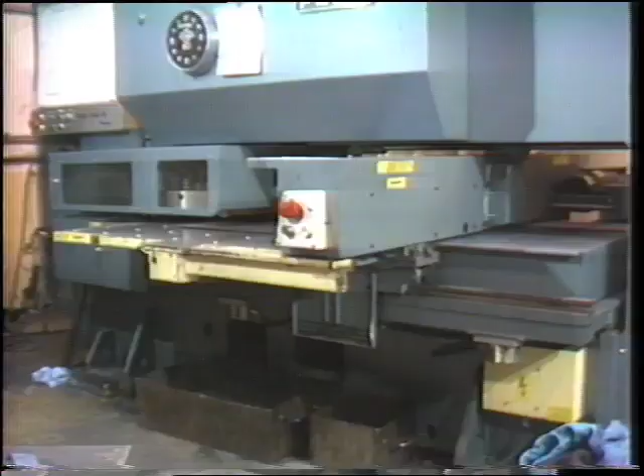In this space-age world we live in, it's still the simple pleasures we enjoy the most. And the romance and beauty of a wood fire is often a part of the scene. Family, friends, and the warmth and comfort of a wood stove and fireplace have become a familiar and everyday part

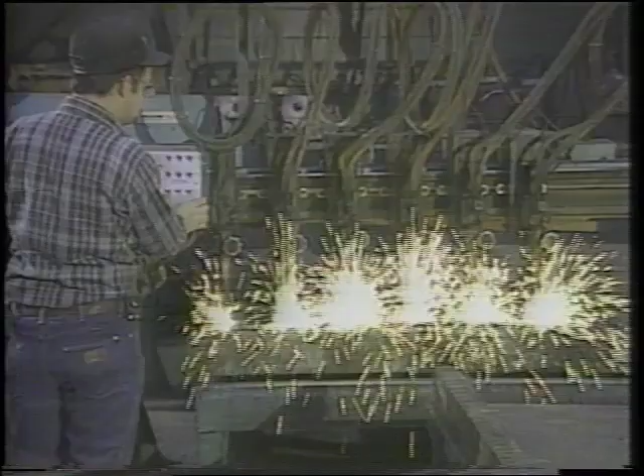of modern living. But today's wood stove is also a modern wood heating appliance, providing safe, efficient, and economical home heating. Built to meet stringent safety and air quality standards, modern wood heating appliances come in a vast variety of styles, colors, and shapes to fit the decor of any home. Modern, traditional, classic. Whatever your tastes, you'll find a wood heating appliance that will grace your home with warmth, comfort, and the pure, simple enjoyment that comes from wood burning.

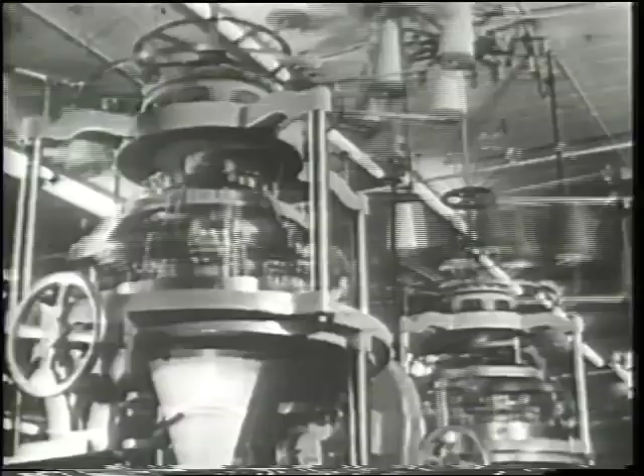As with most modern appliances, the evolution into the modern age was not without trials. America had just left behind World War II. The boys were home, the economy was on the rise, and the good life seemed attainable by everyone. Younger families wanted the latest new appliances that relied on a seemingly endless supply of oil, gas, and electricity for power. The old standby, dependable wood stove of Mom and Dad's era fell out of favor, replaced by the new look of modern heating appliances.

And the good life did indeed continue. Cars got bigger, homes more spacious, and appliances used more fuel. Then the bubble burst. Bigger and faster cars weren't much good in a gas line. The Middle East oil embargo changed the course of America's consumptive ways. Americans now found themselves relying on foreign supplies for fuel. Americans again returned to their old standby, wood, and no wonder. Faced with higher heating bills and dwindling fuel supply, wood, an abundant and renewable native resource, became an excellent alternative.

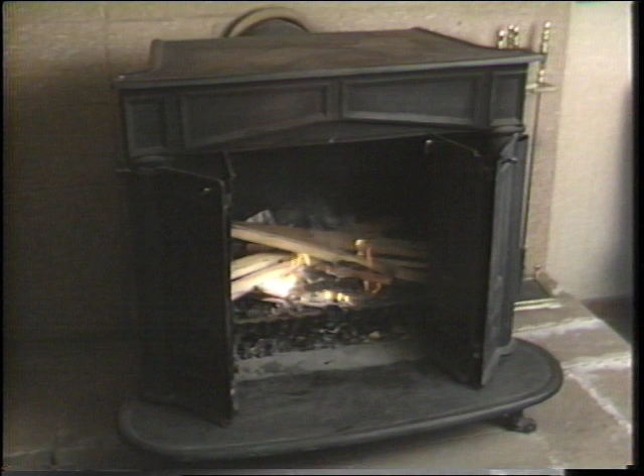Unfortunately, wood stoves had been out of favor for more than 2 decades. During that time, the wood heating industry had become smaller. Wood stove technology had not kept pace. During the same period, our air quality was suffering under the onslaught of a modern industrial world. Reduced air quality, stemming by and large from the reliance on oil-based fuels and coal, became everyone's problem. Unfortunately, some of the blame fell on the small but growing wood stove industry, in part because of the lack of a public education about good burning habits and the industry lag in stove technology.

Matters were complicated by industry efforts to build more wood heating units. Wood had become a popular source of heating. The industry found itself trying to catch up with the consumer demand for more stoves. There was little time to develop the technology that could lead to cleaner and more efficient stoves. Ironically, the intense, renewed popularity that revived this developing industry also caused it to come under scrutiny. It was a case of a developing industry unaware of the growing air pollution problem. The government, as they did with many other industries, sought assistance from the wood stove industry to help solve this air quality dilemma. What they found was an equally concerned and willing partner.

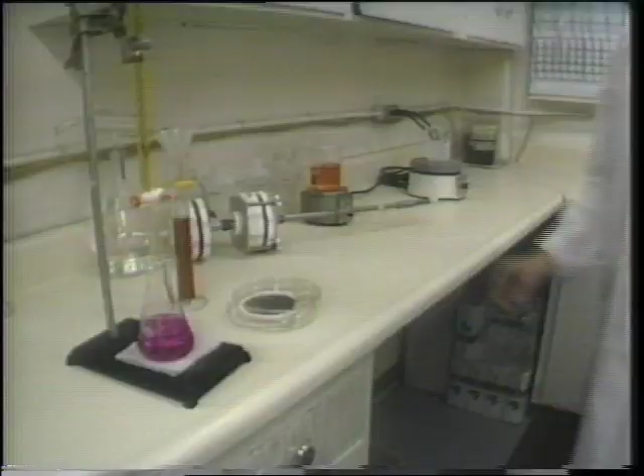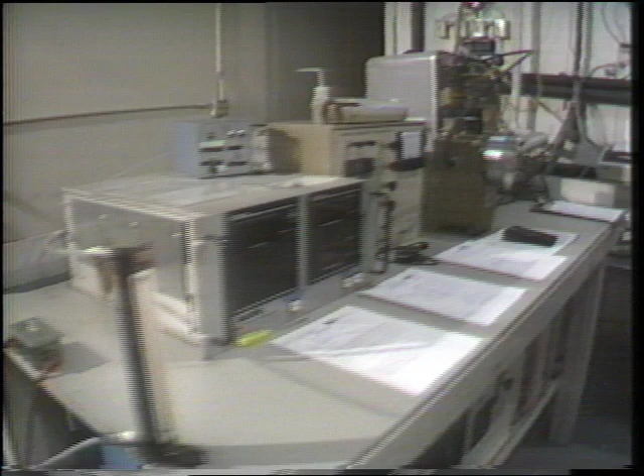In the late 70s and early 80s, wood-burning stove manufacturers, dealers, installers, and trade associations faced this challenge head-on by developing a technologically improved wood stove, cleaner, safer, and more efficient. Further, they began to develop safety listings for new stoves, improved standards for installation, and continued more vigorously educating the public about safe and efficient wood-burning practices. The result of this effort has been positive for both the industry and the consumer.

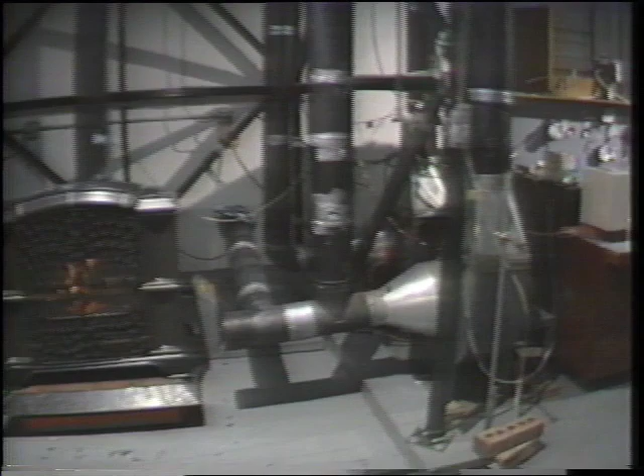Actually, it was discovered that older stoves didn't necessarily have to be a problem. Burned correctly, most were safe and clean. But because they weren't as sophisticated as the new improved design, they often burned inefficiently during a period in which the most smoke is created: long, slow burns. If a homeowner didn't burn dry wood or didn't burn according to the manufacturer's guidelines, the problem intensified. This, combined with existing air quality problems, inspired the wood energy industry to assist the Environmental Protection Agency by developing a cleaner and more efficient wood stove.

This problem-solving new design came about by looking at the basic components of wood combustion. In wood, there are actually two types of fuel available: the solid matter, which we commonly refer to as the wood, which comprises 50% of the available energy, and the smoke that is created by burning the wood, which accounts for the remaining 50% of the energy. The smoke in an older stove was escaping, by and large, into the atmosphere and creating a 50% loss of potential fuel. The problem could be solved by burning the smoke as well as the wood. Unfortunately, smoke has an ignition temperature that is much higher than wood. The problem: how to burn both the smoke and the wood in the same stove.

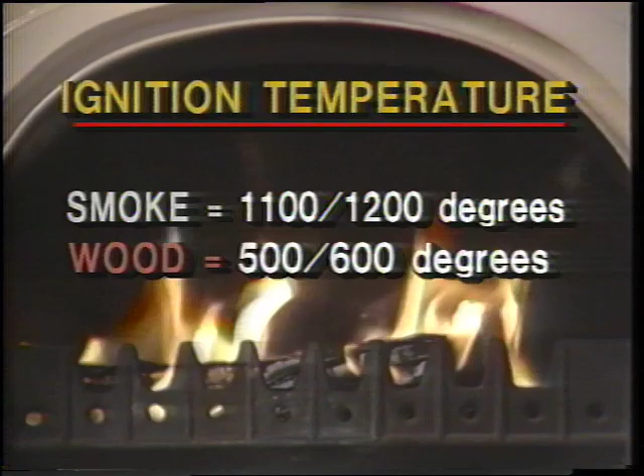The industry responded to this problem with not one, but two improved technology solutions. The standard airtight stove was upgraded in a very significant way. A high temperature chamber was developed and placed in the smoke's exhaust path. By feeding the chamber controlled air, a high temperature environment is created that burns up the particles in the smoke before they can escape up the flue.

This not only reduces emissions significantly, but it recovers the smoke as a valuable source of heat. Because the stove is burning all available fuel at maximum potential and releasing less smoke into the atmosphere, it's burning clean and at the highest level of efficiency.

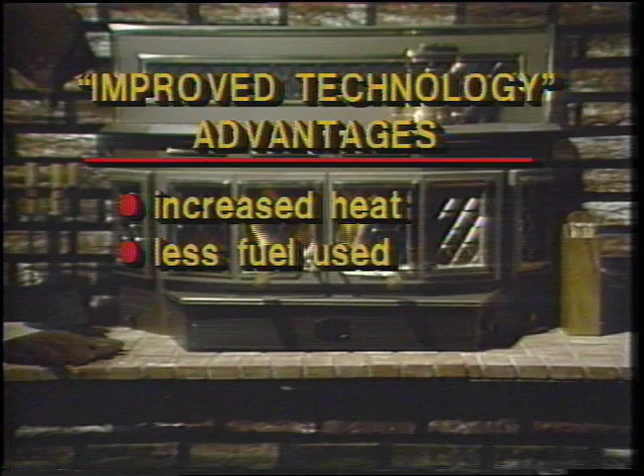The homeowner gains in 4 ways with this improved technology wood stove: increased heat from a more efficient stove. Less fuel is required because the stove burns less wood. An efficient stove burns more safely. And the stove produces less smoke for better air quality.

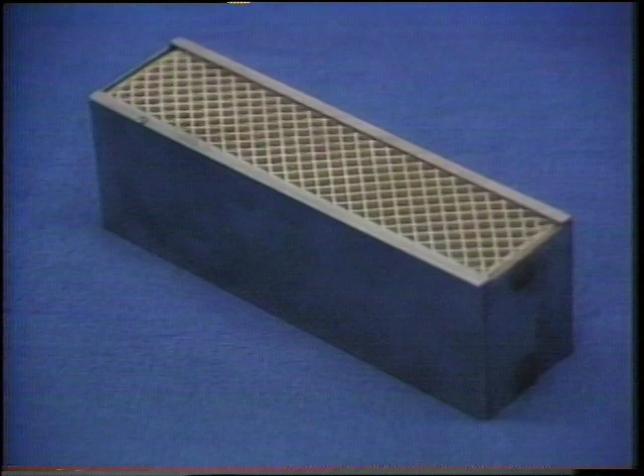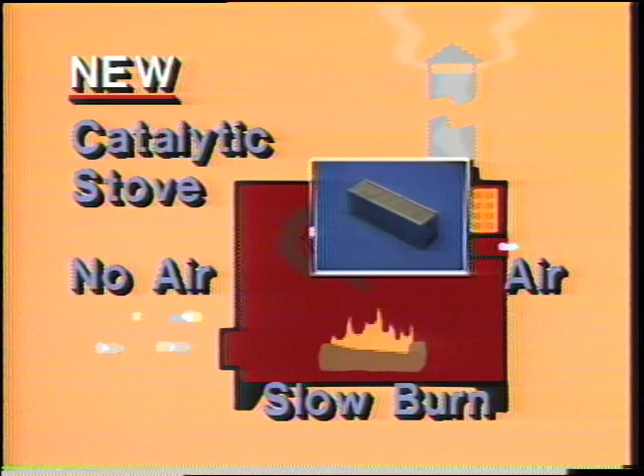Another popular improved technology approach used to solve the air quality problem was the development of a catalytic converter, similar to the catalytic converter in a car, which burns up exhaust smoke before it gets into the atmosphere. In a catalytic stove, the smoke is forced through a honeycomb-like device fed with air.

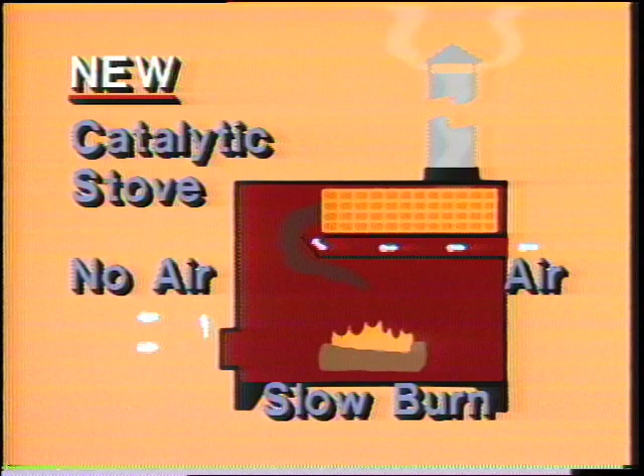This device lowers the ignition temperature of the smoke to one closer to that of wood, thus allowing the smoke to burn at about the same temperature as wood. The same advantages of economy, safety, and a cleaner installation are also benefits of catalytic stoves.

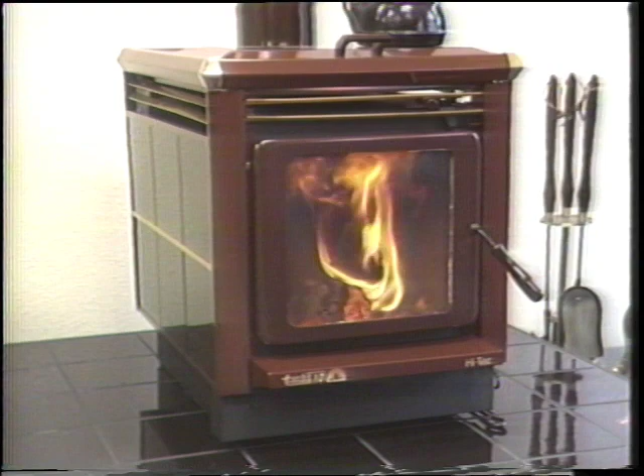So successful are these new improved technology wood stoves, many often exceed the clean air standards enacted by the Environmental Protection Agency. These standards, stated simply, prohibit the manufacture of any wood-burning stove that does not meet the minimum clean air standards set by the Environmental Protection Agency. New improved technology stoves meet the air quality challenge head-on. Today you can enjoy the warmth and comfort of wood and know you're burning clean.

However, this legislation can leave homeowners with some questions. Is my old stove okay to burn? Do I need to buy a new stove? These questions can be answered in 2 ways. No, the law does not require that you replace an existing stove. But there is another answer. Yes, we all have a responsibility to keep our air clean, and an improved technology wood heating appliance does just that.

Besides being a better neighbor, you'll receive the added benefit of more burn for your buck from an efficient, properly installed and used improved technology stove. In addition, you'll have the added benefit of a safer and cleaner stove, and that means the security of knowing you and your family are enjoying wood heat in the most responsible and safest way.

So even though it's not mandatory to purchase a new stove, it's a good idea if you want to take advantage of today's high efficiency, maximum safety, and cleaner burning wood heating appliances. If you have specific questions, your local wood stove dealer or state energy office is the place to start. Your dealer is a wood heating expert and can offer a detailed look at the latest in improved technology stove hardware.

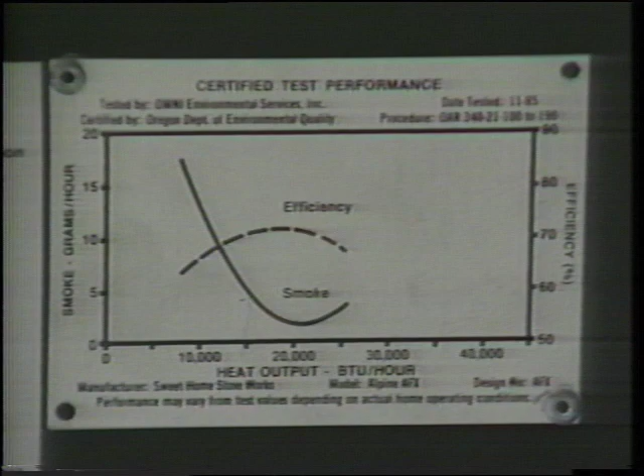One of the first things to look for when you purchase an improved technology stove is a certification label. This label means the stove meets today's stringent clean air standards for wood-burning appliances and has been tested by an accredited laboratory.

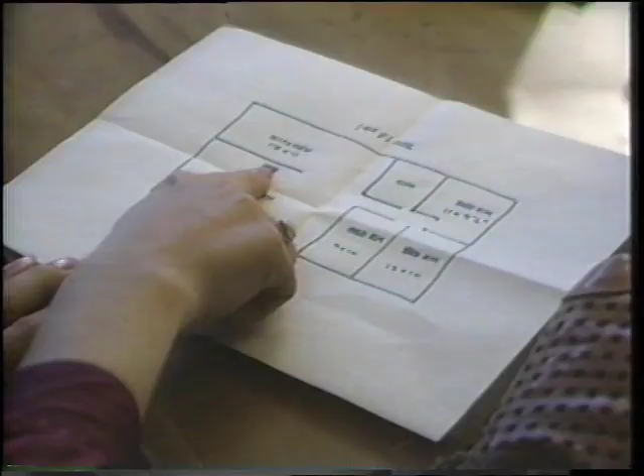The next step is to select the size of stove best suited for the space heating requirements of your home. This is called sizing, and with proper room measurements, your dealer can direct you to many new exciting models that will fit your needs. Be sure to consider ceiling height, room size, and number of rooms to be heated.

Considerations such as heat flow and which room is to receive the most heat should also become part of your plan. All these factors will help you determine the needed space heating capacity of your new stove. Your dealer can then help you select a stove that will deliver the right amount of heat to the right rooms with the proper heat flow at the right cost.

Another important aspect of stove selection and installation is placement. In addition to appropriate heating capacity, your stove should be placed away from traffic areas, and the area of installation should be of sufficient size to allow for proper installation.

Once you've made all the heating and spatial decisions, it's time to take a look at stoves that fit your decor. Modern stoves offer a vast array of styles suited to a variety of tastes. New technology stoves can be bold, modern, homey, traditional, classic, virtually anything you want them to be. Catalytic or non-catalytic, all are certified and bring the advantages of a safe, clean, and economical burn.

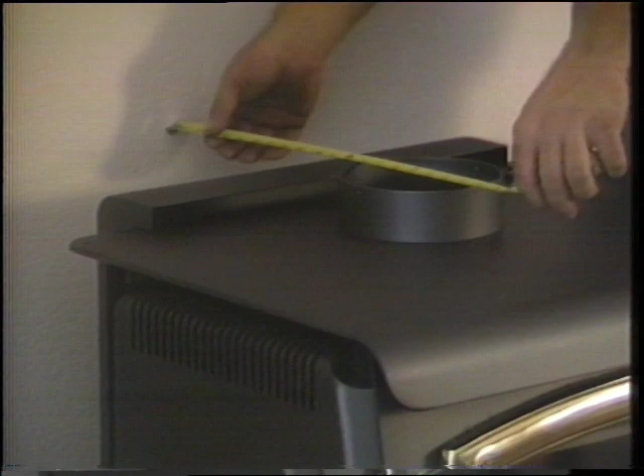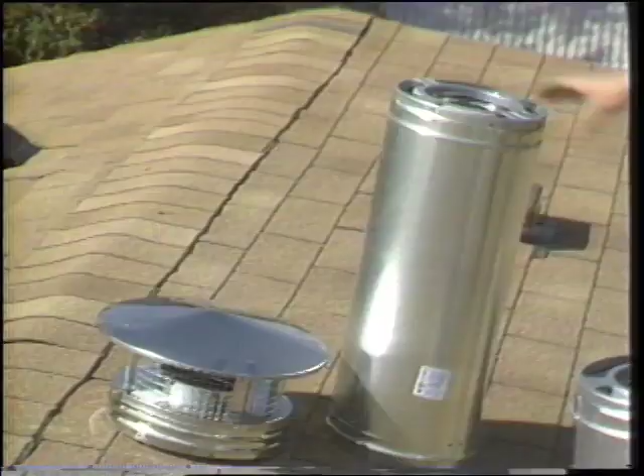Installation of your appliance should generally be done by a professional installer. However, many stoves are installed by homeowners. If you do it yourself, be sure and follow the same safe and correct installation procedures used by a professional. A crucial element in any installation is the chimney. Always refer to your manufacturer's guidelines listed in the installation and operating manual for this important information.

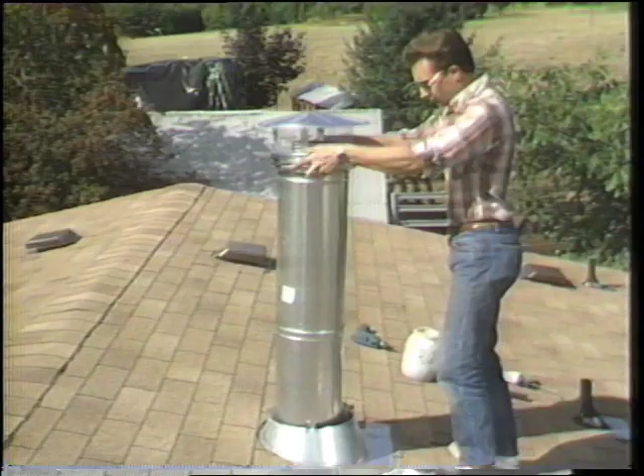Installation of certain types of stoves may involve several chimney considerations. For example, if your choice is a fireplace insert or hearth stove that exhausts into a masonry chimney, you should have your existing chimney inspected for suitability. It may be necessary to add chimney relining to your plans.

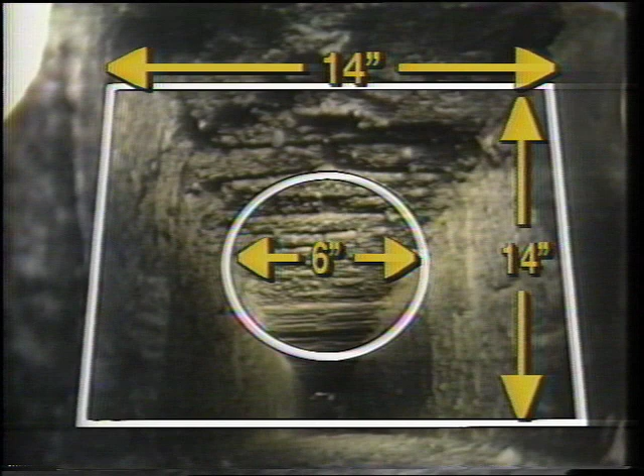Often, older masonry chimneys do not have the necessary clay flue liners needed to provide an exhaust for a wood stove. Those that do have flue liners are sometimes cracked or damaged from age. In these cases, it is necessary to reline your masonry chimney. Further, many masonry chimneys are not sized properly to your stove and need relining for proper sizing of the flue.

Burning a wood stove in an improperly sized chimney can build up excessive amounts of highly flammable organic compounds called creosote that attach to the inside of the masonry chimney. This condition can increase the possibility of a chimney fire unless corrected.

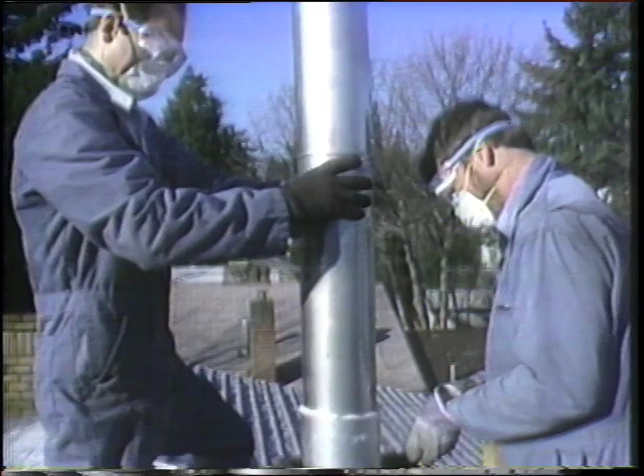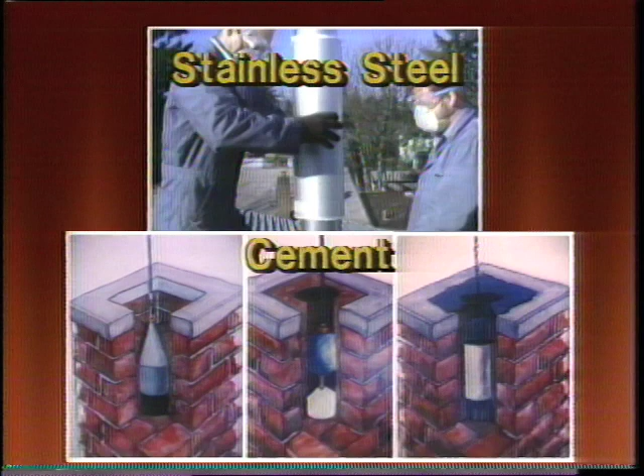The solution to any of these problems is the simple relining of your chimney with one of several types of approved relining systems. As well as contributing to the safety and efficiency of your stove, these systems assure that your chimney is properly sized to your stove. In addition, relining systems used with proper burning practices keep creosote buildup to normal levels that require nothing more than regular chimney sweeping.

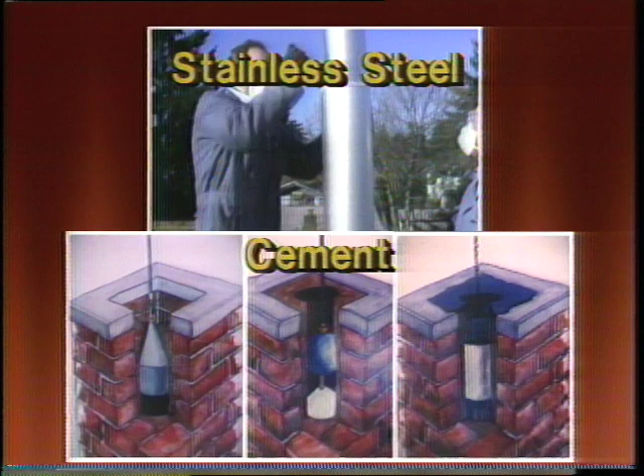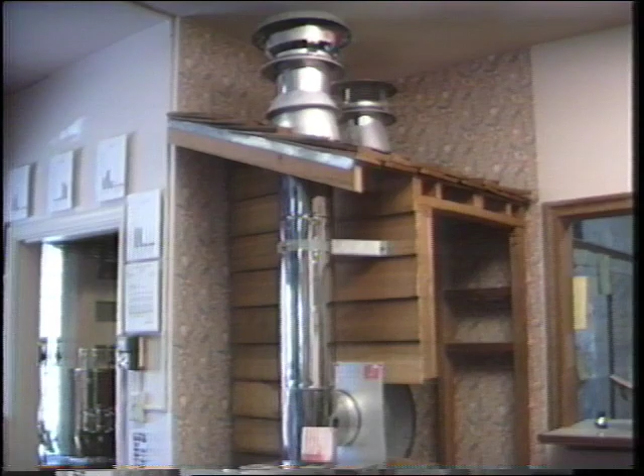Another chimney choice is a factory-built metal chimney. If you're building a home or remodeling, a factory-built and site-installed approved UL 103 HT metal chimney is also a safe and durable alternative and has a flue size to accommodate your stove.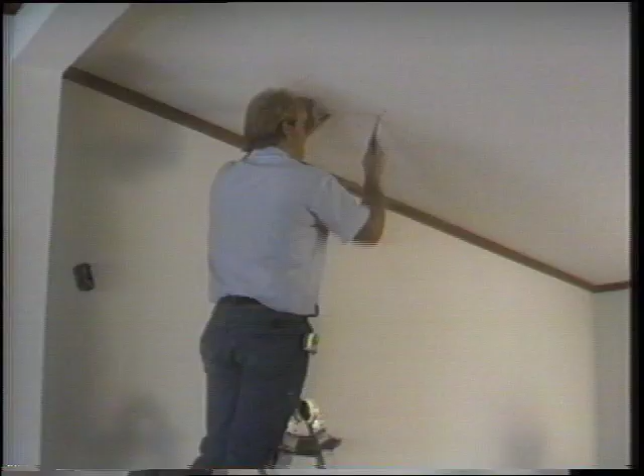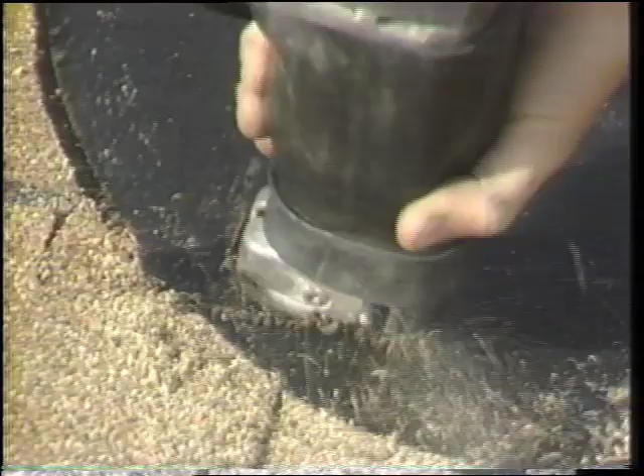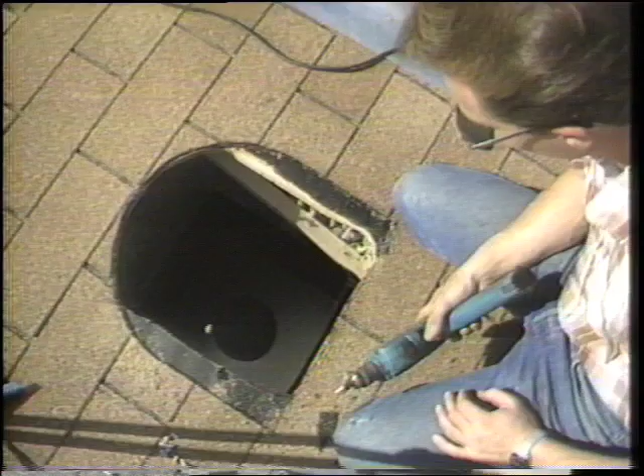Installation of your stove into the room is another important element in determining its safety and efficiency. There are professional installers who are ready to assist you in purchasing, installing, and the maintenance of your stove. In 1981, the Wood Heating Alliance founded the Wood Heating Education and Research Foundation, or WERF for short. WERF is a nonprofit foundation formed to serve the public interest in advancing the safe and efficient use of wood and other solid fuels for residential heating.

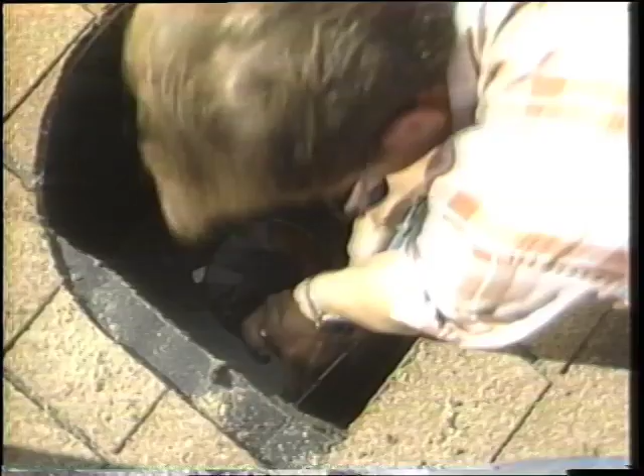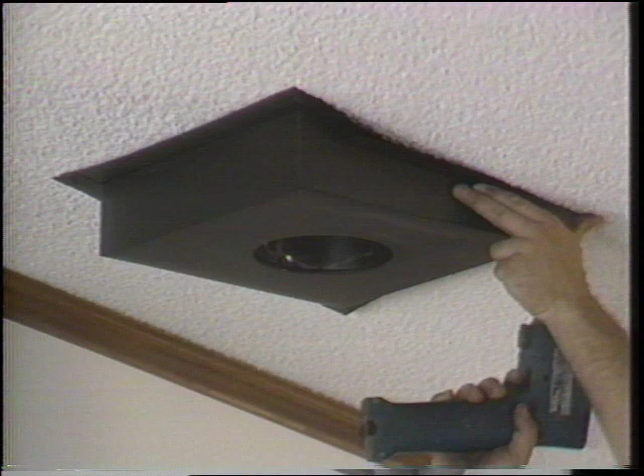WERF sponsors the Solid Fuel Safety Technician Program, an in-depth study and testing program for home heating professionals and fire inspectors on the installation and use of solid fuel appliances. Over 2,200 participants have entered the program and have been certified as solid fuel safety technicians. The aim of this program is to ensure that consumers throughout the nation will have access to experienced and properly trained installation technicians. WERF certification, or using a licensed state installer and checking references, is always a good idea when selecting an installer. When installing a new stove, your wood stove dealer or local chimney sweep should be consulted.

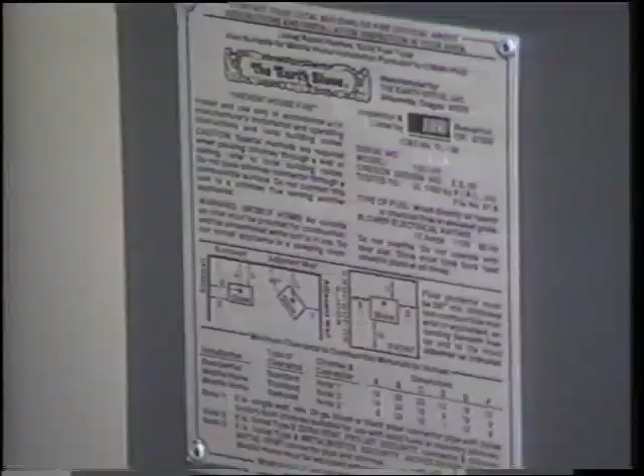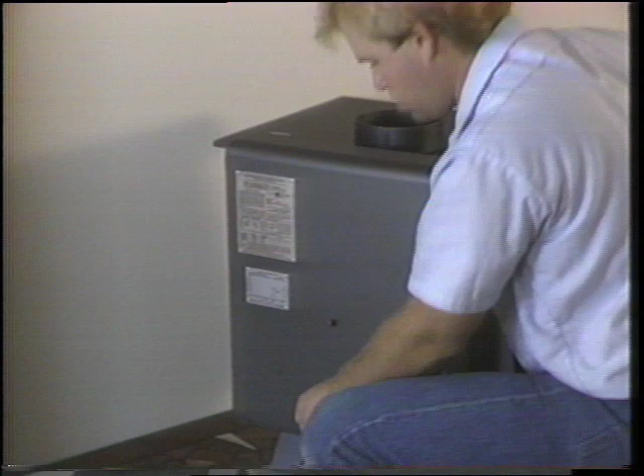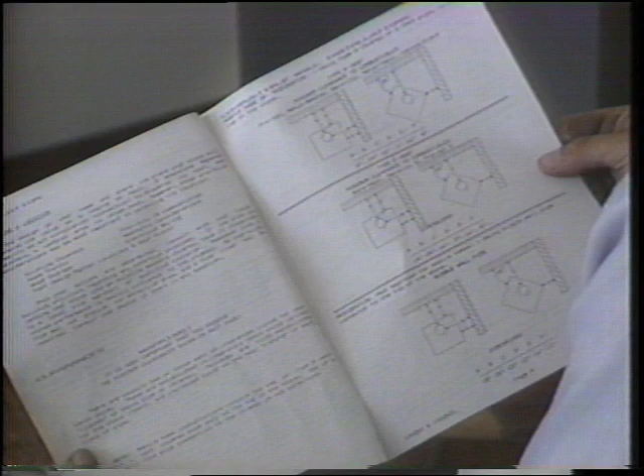Because of the tremendous variety of stoves and styles available, each stove has slightly different installation requirements. A good installer will check the manufacturer's guidelines for installation requirements of a specific unit. Your dealer can answer any questions you might have. Always make sure the installation follows the clearance guidelines on the safety label attached to the back of your wood heating unit. These clearances were established to ensure your stove is installed safely away from household and other structural combustibles. Professional or do-it-yourselfer, it's vital to consult your manufacturer's clearance guidelines in the installation and operations manual.

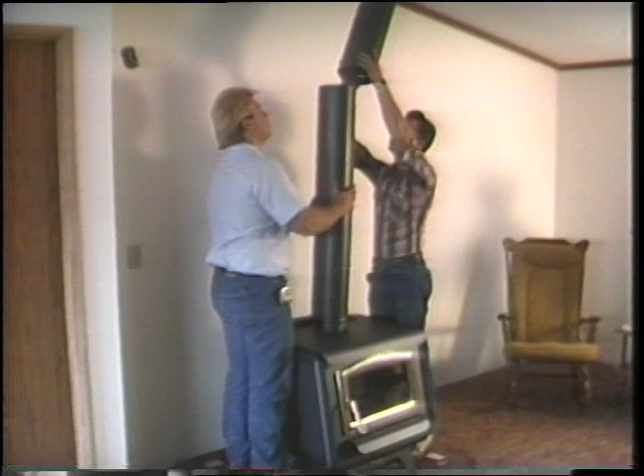Be aware that many areas of the country have differing codes and regulations for wood stove installations. Always check with your local code officials to see if an installation permit is required and what local installation codes must be followed. Any certified installer should be familiar with both permit and installation codes. Again, check with your dealer if you have any questions.

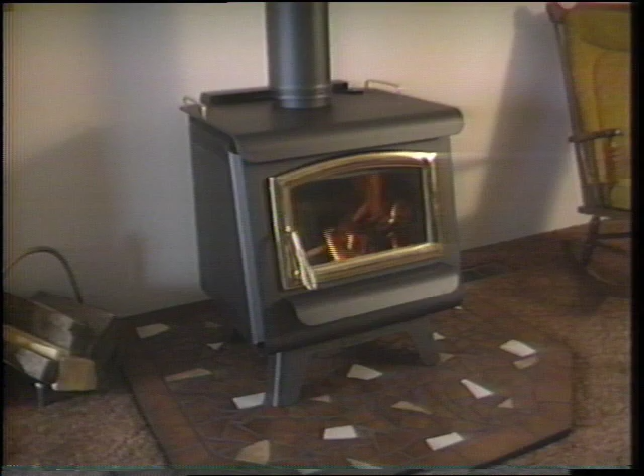Above all, consult your dealer to arrange for a professional installation technician to visit your home. These professionals are experienced and familiar with the wide range of appliances, permits, and codes necessary to the safe and proper installation of your new wood heating appliance. And remember, it's a good idea to notify your insurance agent that your stove has been properly installed by a professional installation technician.

A properly installed certified stove is a welcome addition to any home. It brings the comfort associated with wood heat and is a practical, natural way to heat your home. But like any appliance, the proper use of the appliance and fuel is essential to maximize the safety and efficiency of your stove. The clean, safe, efficient use of your stove can be maximized by the proper handling of fuel and good burning practices. It's easy to do right, and it takes very little time. In return, you'll receive all the benefits that can be derived from the joy of burning wood for heat.

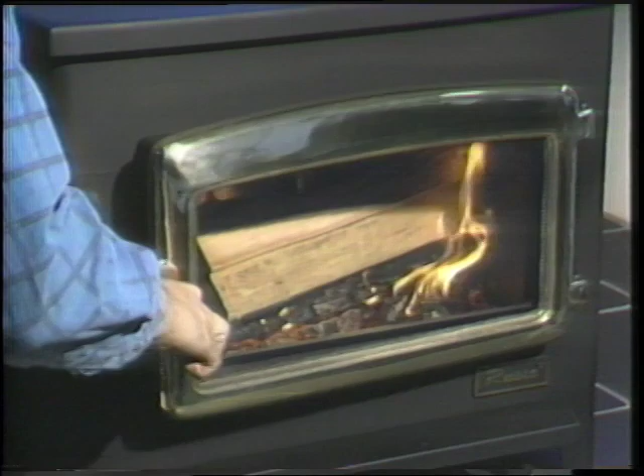Weather can affect the way you use your wood stove. On a cold day, load the stove fully after establishing your fire. Subsequent loads should be lesser amounts. After a good coal bed exists, it is usually sufficient to add one log at a time. On warmer days, burn smaller fires, but keep the air setting high enough for a clean burn.

As a general rule, burning large pieces of wood on a hot coal bed will keep the fire constant and your house warm. The best advice is to consult your manufacturer's installation and operating manual for the proper startup and refueling techniques best suited to your stove. Be a good citizen, and if there are regulatory no-burn days in your area, don't burn.

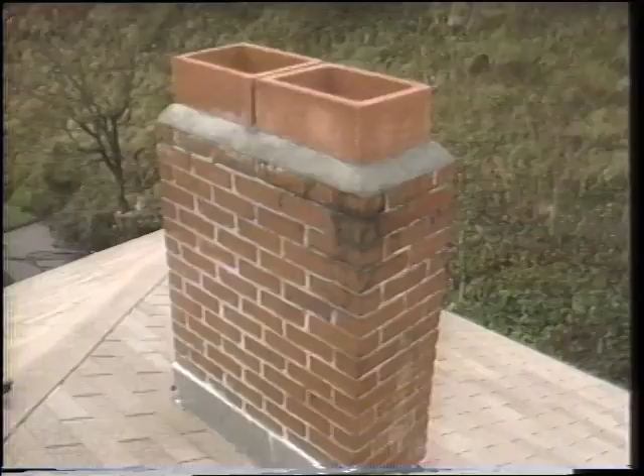Another concern in the home that can affect the efficiency of your stove is back puffing. When smoke is being pulled back into the room, the source can usually be traced to open windows or exhaust fans. They are creating a reverse flow in the room and pulling smoke into the room. Simply close or shut off the source of the disturbance and the stove will return to normal. Another potential source of back puffing can be an improper chimney draft. Consult your dealer if the problem persists. Above all, follow your manufacturer's recommendations, and you'll know you're receiving the best service and safety your appliance can deliver.

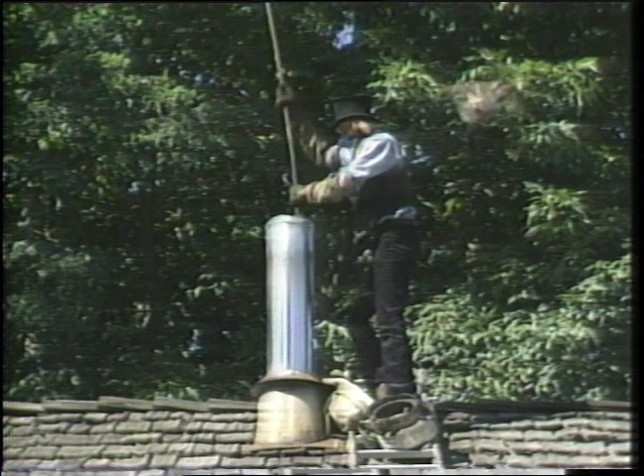A final and essential ingredient that cannot be stressed enough in burning wood is maintenance. You wouldn't think of not servicing your car on a regular basis. So it goes with your wood stove. This modern appliance will give you long, trouble-free performance with a modest amount of maintenance. Have a professional sweep, clean, and inspect your wood stove and chimney at least once a year before the burning season begins. In heavy burning areas, even more frequent service may be required.

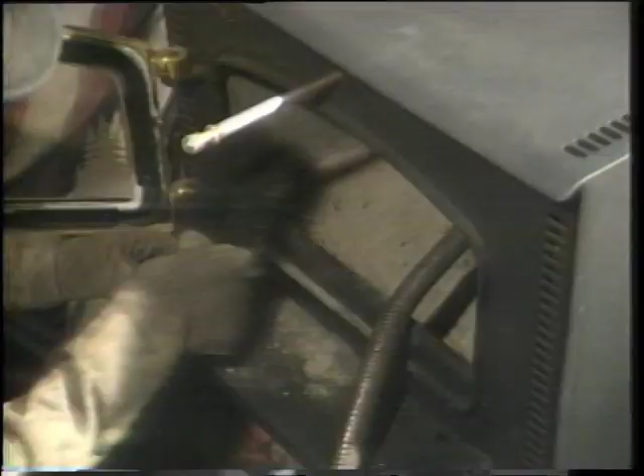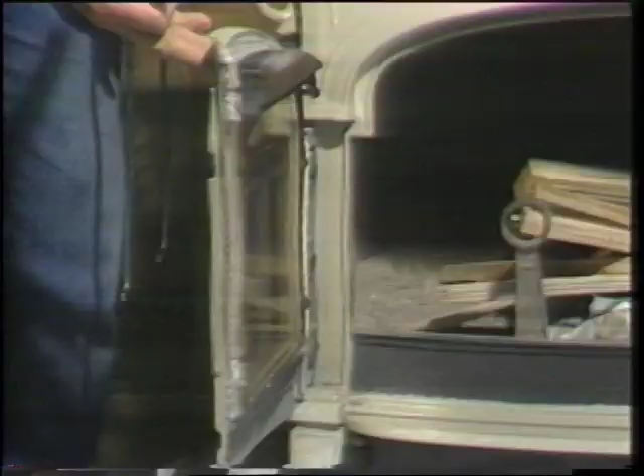Each year, a thorough inspection of your stove for items like cracks or bad seals is essential. On a catalytic stove, check to see if the catalyst is clean and the bypass valve works freely. No matter what type of stove you have, always have all ash removed from the stove at the end of the season. You should also personally inspect your stove and chimney at least every 2 months. If you spot problems or cleaning is necessary, attend to it before the burning season starts.

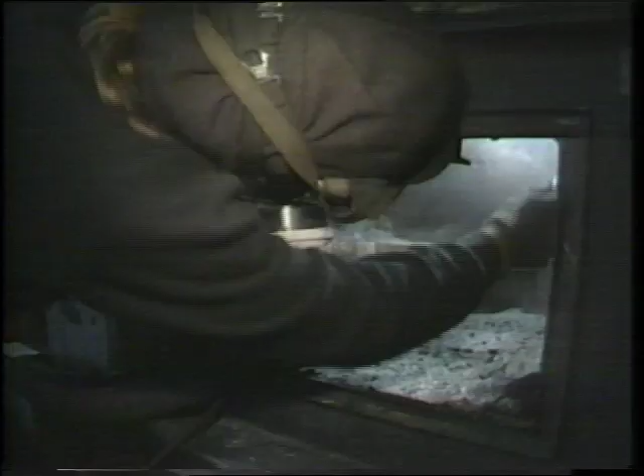But always have a professional sweep, inspect, and clean your stove and chimney at least once a year. A good, thorough job should include an inspection and complete cleaning of the entire heating system. For information about qualified sweeps in your area, contact your local dealer. A wealth of printed material is available from various industry and government sources. If you'd like information about these materials or simply have questions, consult your local dealer, chimney sweep, state energy office, or call the Wood Heating Alliance at this toll-free number, 1-800-KEEP-WARM. We'll be glad to answer your questions or direct you to someone who can assist you.

Today's wood stoves are easy to operate, dependable, stylish, economical, more efficient, safer, and cleaner burning than ever before. So enjoy the best with improved technology wood stoves. They offer all the advantages of a modern design, plus the warmth and security of wood. To put it simply, feel good about wood. Join the wood burning tradition.